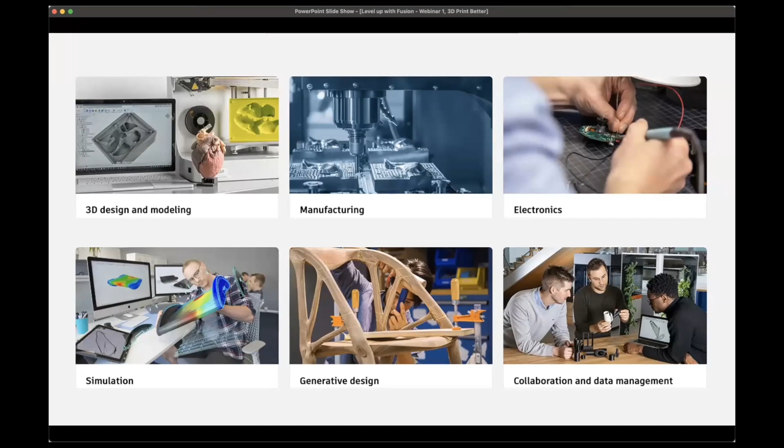Now, why would you consider using Fusion in your classes? It's because it allows your students to experience real-world product design and creation. Fusion mimics all the professional and industrial programs across the Autodesk suite, and it's used by many businesses designing real-world products. So if you bring Fusion into your classroom, students can really experience the design process, the design cycle, to make a real-world product from start to finish—whether that's a sketch, a model, manufacturing using some production technique, even creating circuit boards, electronics, animations, renderings, and more. It really allows your students to experience what it might be like to be an actual designer, product engineer, or manufacturer.

That's really exciting for students to get these skills hands-on, and we'll be talking about lots of great resources to help you get started with these topics in your class throughout tonight and the whole series.

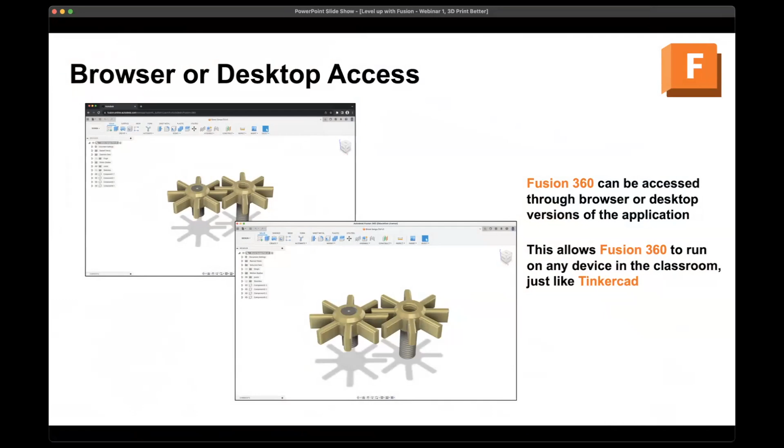A couple great questions I see that I think I'm about to answer. First off, Fusion can be accessed in the browser, just like Tinkercad, so you can use it on virtually any device, as well as on desktop—if you download it for Windows or Apple, you can use Fusion there too. So there are two different ways to access Fusion. Educators and students also have access to Fusion for free. You do need to create an Autodesk account, which is free to make, and depending on your region, students have a certain age requirement—for example, 13 in the United States, though that varies depending on where you are. But you do not need to pay for Fusion to have access; you have access through these educator or student accounts you can create.

There's also Fusion 360 Teams. I saw a question about creating classes, like in Tinkercad—it's called Teams in Fusion. You can create a team, which you might call your class, or period 1, or period 2, and you can share projects.

Students can work in groups. They can share their Fusion documents from one to the other. You as the teacher have access to seeing everything. So if a student creates something within your team, you can see that. You have access to your students' documents, and it's a great way for them to collaborate, and it actually reflects a business model. For example, if I was working in a company, I'd create a team between my colleagues. So it reflects that as well. A little bit different to Tinkercad class, but a very similar outcome and what it allows you to do as a teacher is help your students with their documents in Fusion.

There's also limitless ways to customize Fusion 360. There's a lot of different apps and things you can do, and everything's very customizable. The first thing I recommend folks do when they come from Tinkercad is customize their preferences, and I have this linked from the Tinkercad blog. You might initially, if you come from Tinkercad, be unfamiliar with the mouse and the way the buttons work. You can actually change Fusion 360's preferences to mimic how you click, scroll, and navigate just like you do in Tinkercad. If you're bringing your students from Tinkercad to Fusion, that's definitely something to consider because it'll make Fusion far more comfortable for them to approach.

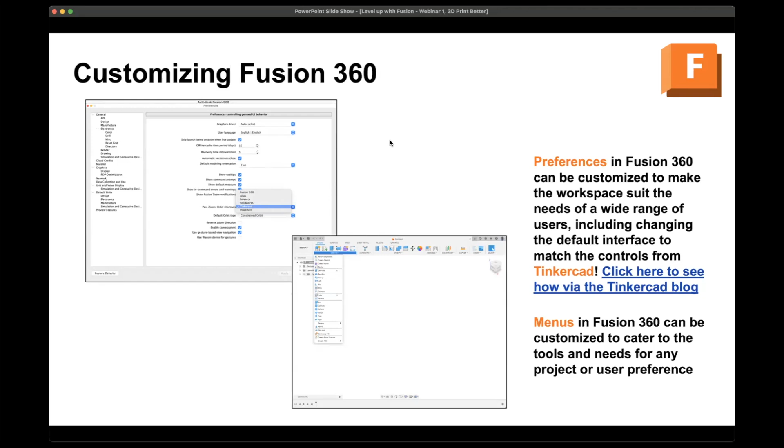So tonight's webinar is all about 3D printing better, right? Before we dive in, I think it's really important that I define the factors for determining 3D printing success, because obviously 3D printing is a very, very big environment. There's lots of different types of things you can do, lots of different types of 3D printers out there. So if I say 3D print better, how do we actually know it's better? What am I using to determine that? There's a couple factors.

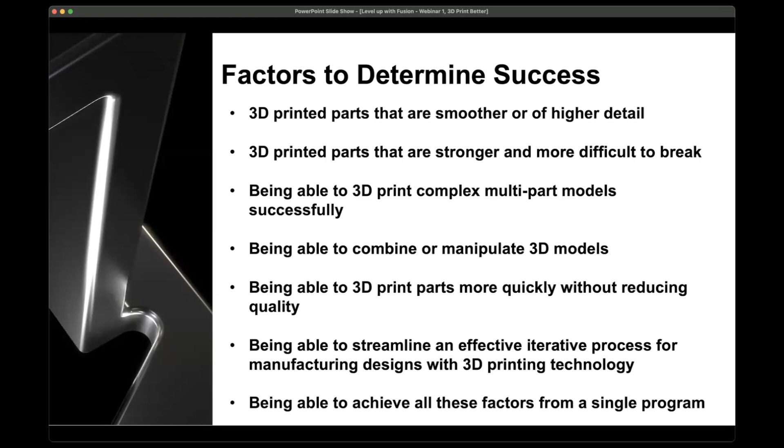First off, can we make parts that are smoother and of higher detail? That's a big reason you might want to consider taking your things from Tinkercad into Fusion, as I'll show you in a moment. Also, 3D printing parts that are stronger, more difficult to break — how can we design things to handle a high level of stress or load, if I wanted to make a bracket? Also, 3D printing multi-parts — what if I want to make something complex, very geometrically challenging? How can I do that smoothly or effectively? How do I combine different models? What if I want to take a model from one place, manipulate it, and combine it with something else? How could I actually 3D print things more quickly or effectively? And most importantly, how can we go through an iterative process — from design to testing to evaluating to manufacturing to redesigning, like a real engineer or product designer might do, all in one inclusive space? That's one of the biggest features we're going to use from Fusion — the fact that it's all included in one space as we work through 3D printing.

But I want to take a second to remind you that 3D printing is a massively diverse field. There are endless different 3D printer brands. There are different types of 3D printers, from fused deposition or fused filament types, to a laser liquid stereolithography SLA type printer, or a powder printer, or a metal printer. There are so many different types of 3D printers out there, and we can't dive deep into the nitty gritty details for each one. But there are strategies for designing good practice models that would be suitable for a lot of different 3D printing environments, and that's what we're going to really focus on tonight.

This will cover best practices, tips and strategies for implementing these practices in your classroom that work on a wide range of 3D printers. Towards the end, and even in the beginning, I'll show you some models and things from my own printers, which might be similar to the ones that you have. They'll help facilitate the conversation. So the first thing I want to talk about is designing in Fusion 360.

Let's talk about Fusion 360 versus Tinkercad. Why might you want to transition from one to the other? I'm going to change my screen share so you can see this coffee mug, which is my personal favorite first project to do in Tinkercad—because I enjoy my coffee, and because it's a real world product that students can design and create.

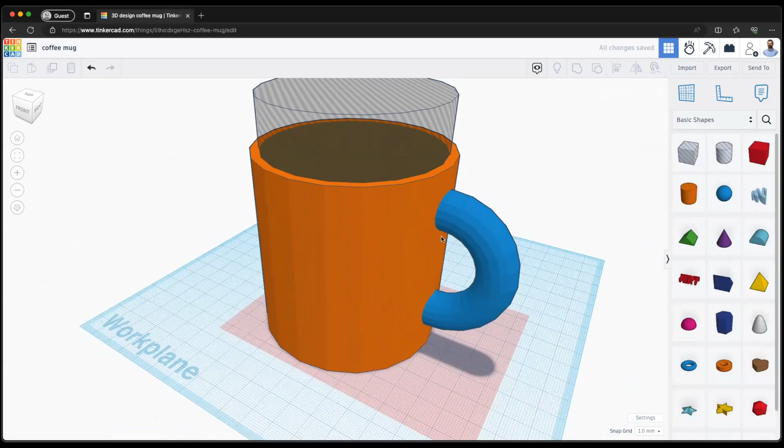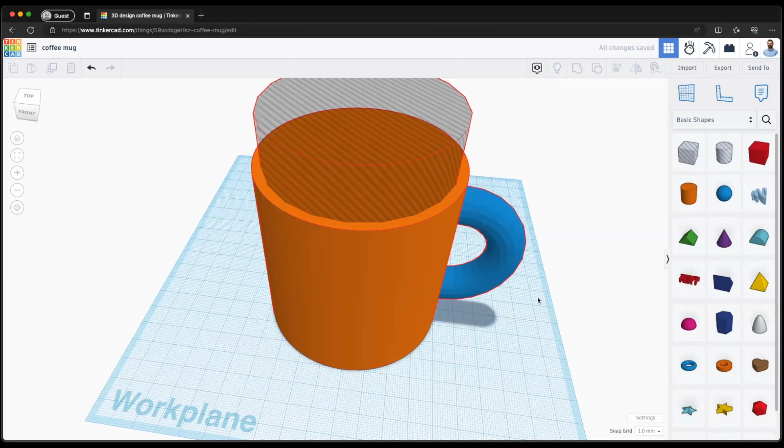We can see that this coffee mug is made from multiple parts. If I double click, you can see a couple different cylinders, and my torus shape, or rounded shape, as I design it. You'll also notice there are ridges on the sides. Yes, I can change the number of sides on my cylinder to make it smoother, but even if I go all the way up to 64 sides, you can see there are still some ridges—it's not perfectly smooth. And with my other shapes, I still see this.

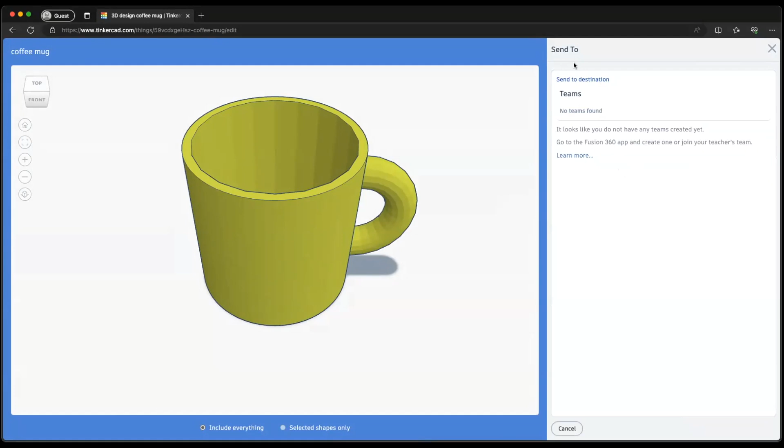One thing you can do from Tinkercad is use the export or send-to button to take your design right to Fusion 360. If you have an account set up, you can actually add things directly to a team—so if I was part of a class team, I could send that right to the team, which is super cool.

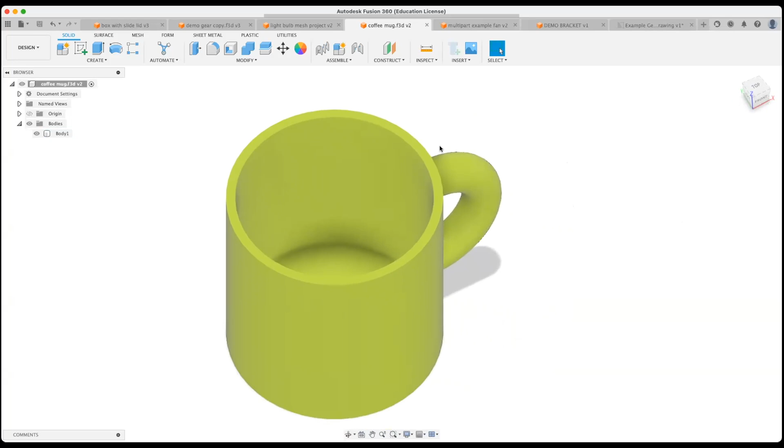You'll notice immediately after bringing your design into Fusion 360, it becomes smooth. That's because it's created into a solid shape—it takes your design and brings it into the Fusion geometry, and we can see it's smoothed over. Look at how smooth this torus is. That's automatically going to increase the quality of your designs, and you'll see this when you 3D print it.

I'm going to stop the share briefly since I need full screen for this. This is my Tinkercad mug, and you can see all those different sides in the 3D print, even in the torus—you can see those bevels. But my Fusion one is very smooth.

Very, very smooth—I didn't do anything in Fusion other than import it, and that automatically took my model and enhanced it just by bringing our design into Fusion. So that's one way to automatically improve your 3D print quality by using Fusion 360, which is excellent. Let me bring Fusion 360 back so we can continue the conversation.

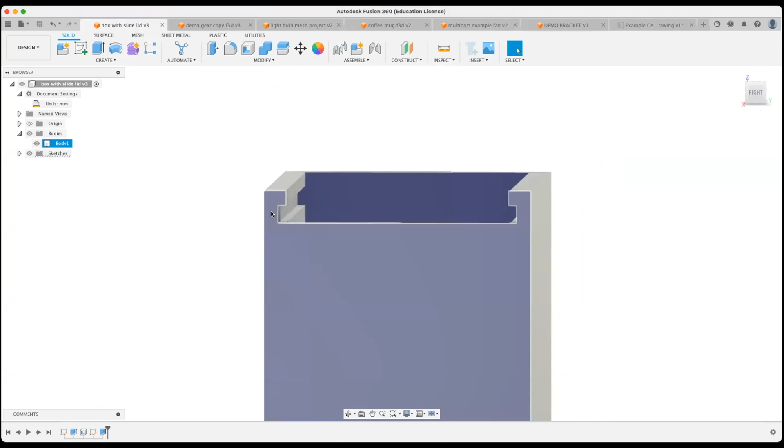Another big thing that's really important to consider is tolerances with your design. I'm going to switch to this box—I want to create a lid that slides into this box, so it's a box with a nice sliding lid. Now, if I were to make my lid fit corner to corner, it might be so rigid that it won't actually slide.

The reason is we need to give ourselves some wiggle room in general for moving mechanisms, but also as you 3D print, your filament tends to change shape—when it goes through thermal properties, it usually shrinks a little bit. So you might need to add tolerances, and this buffer is going to change depending on your setup.

You might be working with one type of printer that's higher quality versus a printer that's lower quality—the lower quality printer might need more tolerance, more wiggle room. Something else that might change is the type of filament. I often print in my classroom with PLA filament, which is usually referred to as the safest filament you can use in schools.

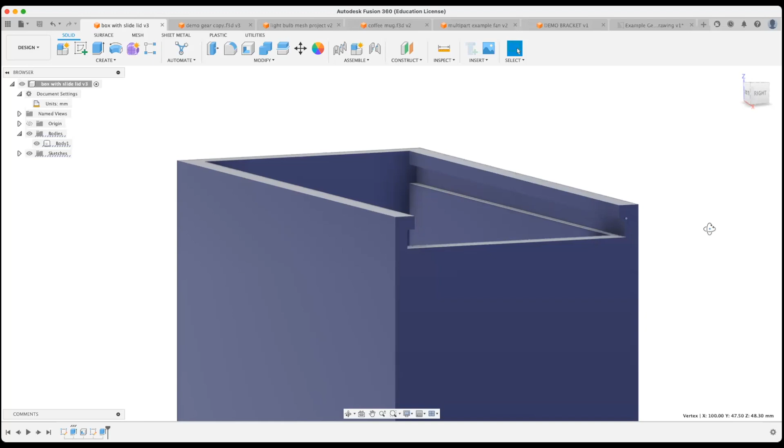And that has a completely different tolerance than, say, ABS, which prints at very different temperatures. I also sometimes find that the tolerances vary depending on the orientation, meaning that if my part's printed horizontally versus vertically, the tolerances might vary a little bit.

There we go. So in general, a good practice for tolerances is usually half a millimeter. I find that to be a good general starting point. Adding half a millimeter of space is usually a good practice when working in typical settings for PLA if you want a nice loose fit whenever I work with my students. So if I want them to make a hinge, or a lid for a box like this, I usually have them add half a millimeter of buffer.

For my folks in the States, that would be like 0.02 inches or so. Hang on, let me give you the accurate conversion for my international folks. 0.02 inches, yeah, that's what I thought. 0.02 inches, or half a millimeter, is a little bit simpler to say.

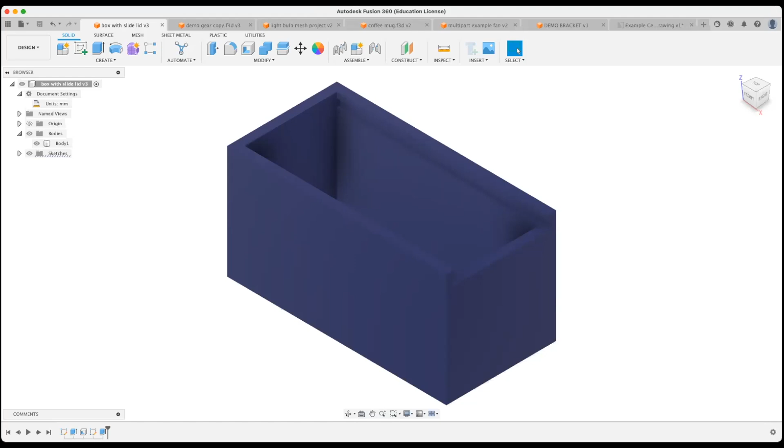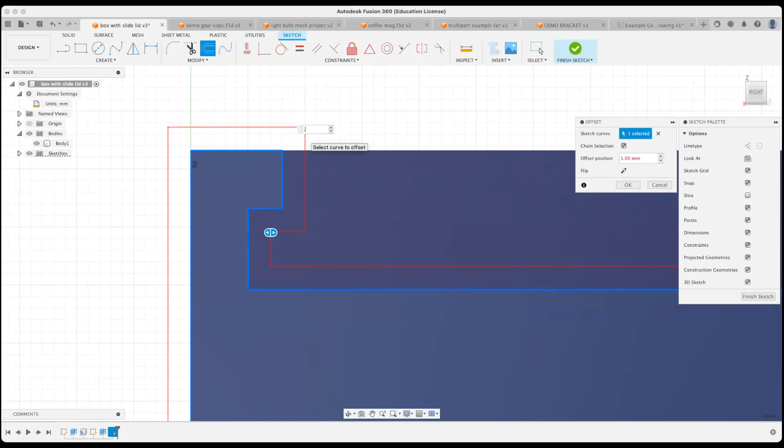So here's what I mean by that. I'm going to make my lid for my box. I'll make a new sketch on the front of my box, and I'm just going to use this offset tool to offset a shape within. You can see this red line is what I'm offsetting, and I'm going to make my offset distance 0.5 millimeters, like this. The dark blue is a little hard to see, but we can see that this line is drawn half a millimeter away on all sides within my box.

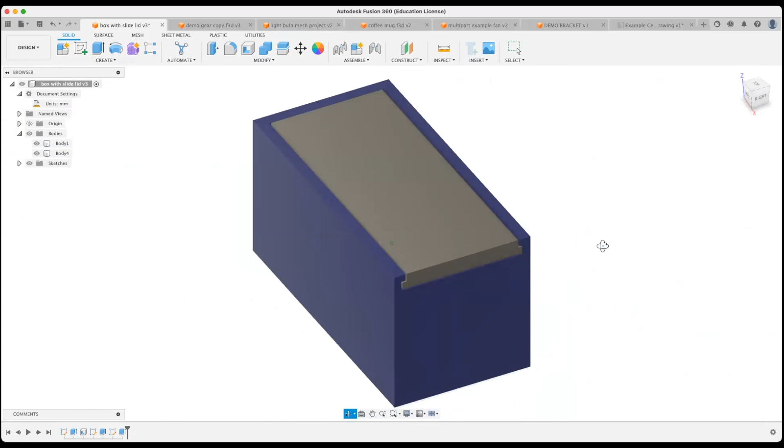Then to finish my lid off, I just need to draw a line that would connect like so. Then I'm going to extrude this lid shape until it hits this back wall, and make sure it's not the same part. So instead of saying join, which would make it a solid part, I'm going to say new, and that gives me this lid. We can see under the bodies, which are my parts, I have a lid, I have a box, and I have my tolerance added right there.

But again, I need to be super clear: half a millimeter might not be optimal in your printing conditions with your model printer. It's just a good place to start. The bigger the tolerance, the easier it will be to fit together. But of course, if you're looking for a more snug fit or whatever it is, you can experiment and use trial and error as you go.

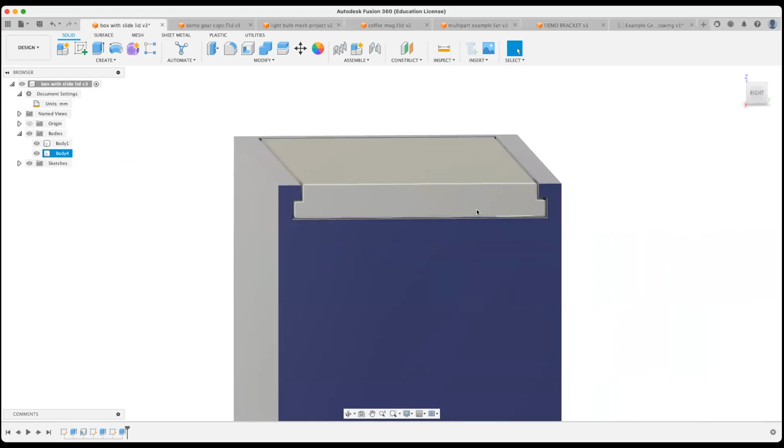I also just want to point out that we might want to consider part orientation. What I mean by that is if I were to actually 3D print this, I wouldn't want to print this box with the lid just like that. Because realistically, if I tried to put supports or actually do this, the lid's probably going to be fused with my box.

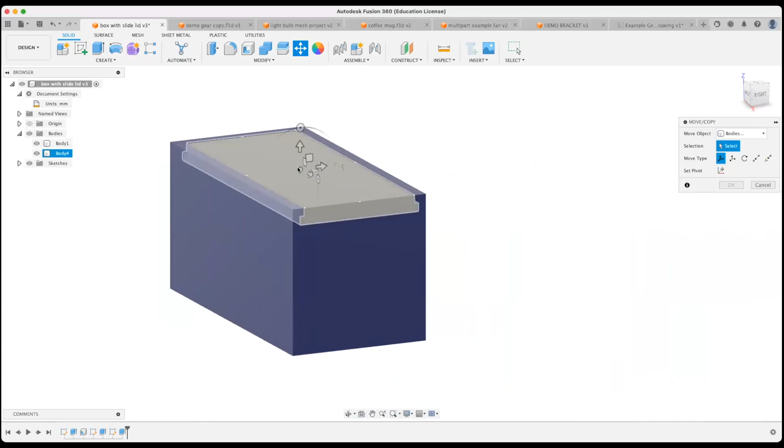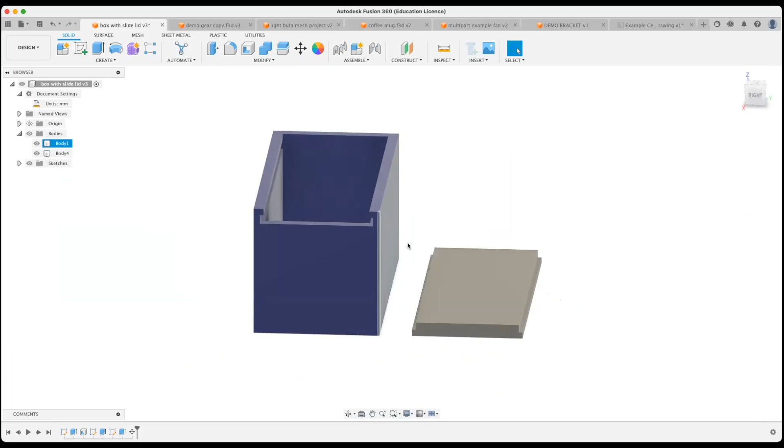So what I would actually want to do after designing it is take my lid and move it like this next to my box. Now I'm printing on this nice flat surface, with my box like so, with the opening facing up. That's going to allow me to get a much more effective and stronger print. I could even print it in two separate colors on two different prints or whatever it might be, just like so. Now, to talk more about what I'm mentioning with part orientation, I'm just going to make a really simple bracket.

I also know that some of you are completely new to Fusion, so I just want to run through some basic designs here. So what I did was I just made a sketch, which is how you usually want to start your designs, and I can use a series of tools.

As I mentioned, this is a customizable toolbar. So I can see some of the default tools, but if I browse my Create library, you can see there are many different shapes. And if you find that you use one frequently, like, for example, the 3-point arc all the time, you can actually pin it so that you can change which buttons you see. I always recommend that teachers start introducing Fusion by building a toolbar that you find to be the most supportive to your students and their needs.

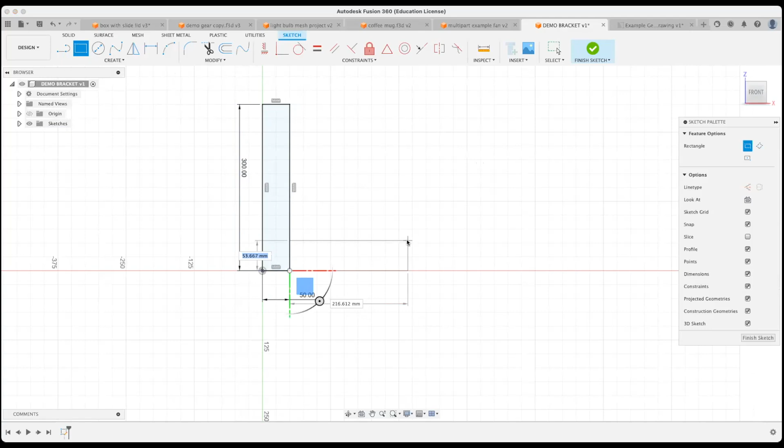I'm going to use the rectangle tool to draw a rectangle, and I can use the dimension tool to set dimensions. I'm working in millimeters, but you can set your document to whatever unit you'd like to work in. I'm just going to make a really simple bracket here.

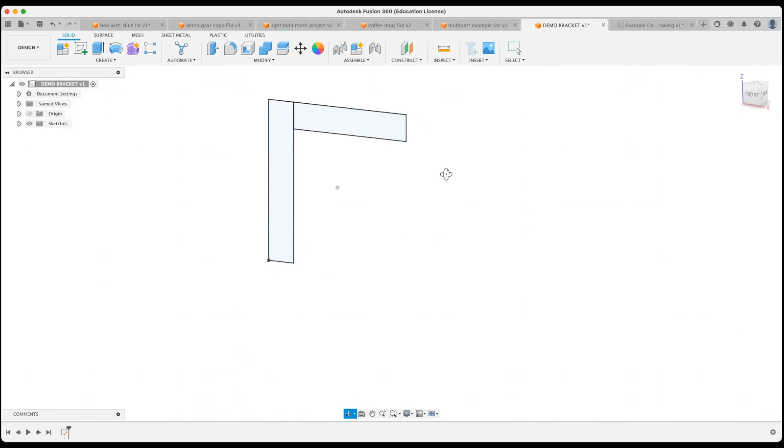I started to design it in a good way, but I want to intentionally design it in a bad way to make a point. So we're going to just make a nice little bracket, perhaps to support something, whatever it might be. Cool, bracket. Okay, I'm going to extrude my shapes.

If you're coming from Tinkercad, this is the biggest difference: in Fusion, you start with a 2D sketch and turn it into a 3D shape, whereas in Tinkercad you might actually start with a 3D shape that kind of sort of looks like this. While that does add a couple steps per se, it also opens up limitless possibilities as you're creating.

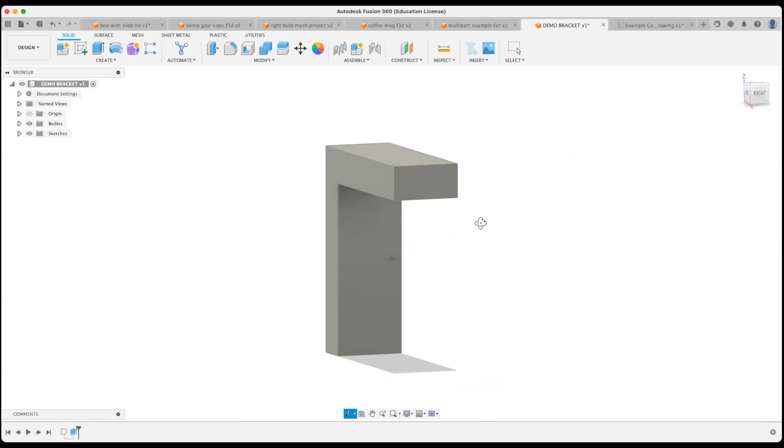Of course, we're going to dive way deeper into these types of concepts in all of our Fusion webinars to come. I'll make my bracket slightly more complex just by adding a couple holes here, as if I was actually going to mount something to this, with whatever dimensions it might be. Then I'm going to again use the extrude tool to cut these through.

Now I have my bracket. Very, very simple. I would not actually want to 3D print the part like this, because if I were to 3D print it like so, this bottom area is open, and I would be trying to 3D print in thin air. While there are some really cool videos online about people doing this, it's not the most effective way to 3D print. What you have to do in this environment is add what's called support material, which can be peeled away.

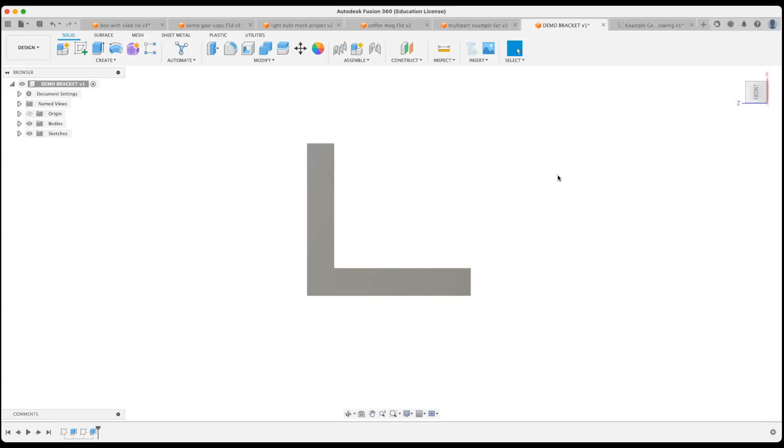For younger students, that could be a little bit more challenging. They might need to use pliers or something like that to get a really nice finish. So the best thing to do, after we design our parts, is consider print orientation. Even if I design my part like this, I might actually want to 3D print it like that, which makes sure that my flat edges are touching the build plate, reducing the need for support material.

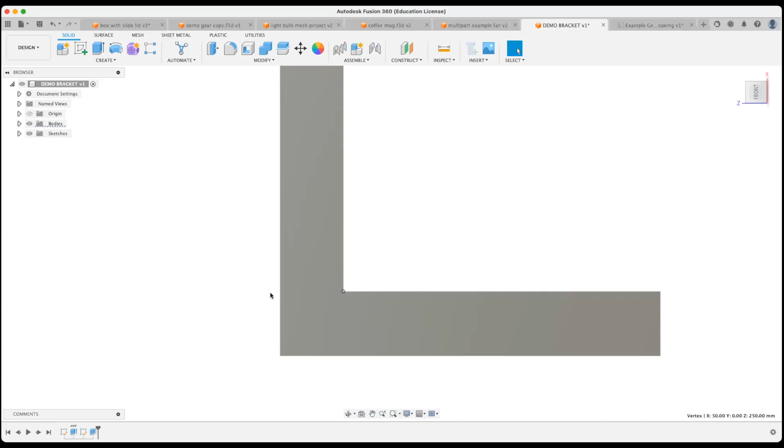Something else you might want to consider, which I know is a common question from Tinkercad users, is adding fillets or chamfers. This very sharp angle right here could be prone to cracking. Let's imagine I'm using a typical FFF, fused filament fabrication, or FDM, an extruder type where you load filament and it squeezes it out — very common types of 3D printers. If this was where a layer was, I might snap it right on that layer, so it's not a very strong part.

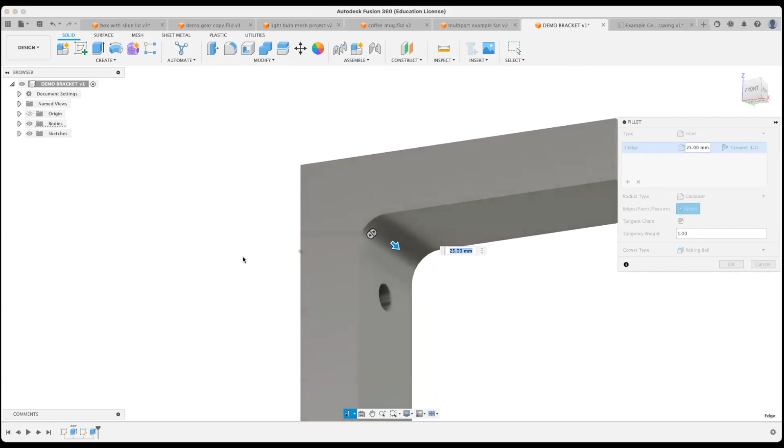But something I can add is a fillet, which is a rounded edge, like so. I can add a round right there, which will allow this corner to be taken up on multiple layers and drastically increase the strength of this part.

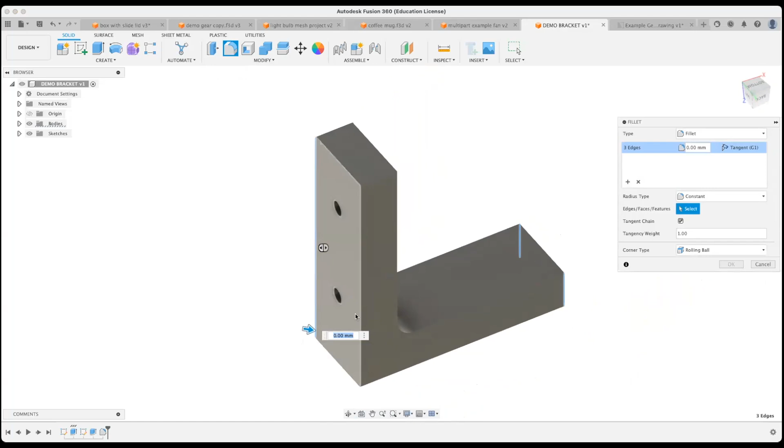I also find that some folks ask how you can 3D print more quickly. A great way to increase the speed of 3D printing is to actually get rid of your sharp corners. This isn't always ideal; you might want to print with a very sharp corner depending on your model. But if I click on my edges here and put the slightest round, a small round, as my 3D printer is traveling to do these corners, it doesn't have to double back and do this really sharp edge. It'll just sort of follow the curve, and without adjusting any print settings, you might find that reduces a noticeable amount of time.

If you're printing one bracket, is it going to save more than a couple of minutes? Maybe not. But if you're going to print 100 brackets, you might find you cut 30, 40 minutes off of that, which is a cool production technique as you go. Not required, though.

And again, depending on what your model is, that might not be an option. But it's a really great way that you can consider to not only increase the strength of your parts, but potentially save time. And I mentioned the word chamfer before.

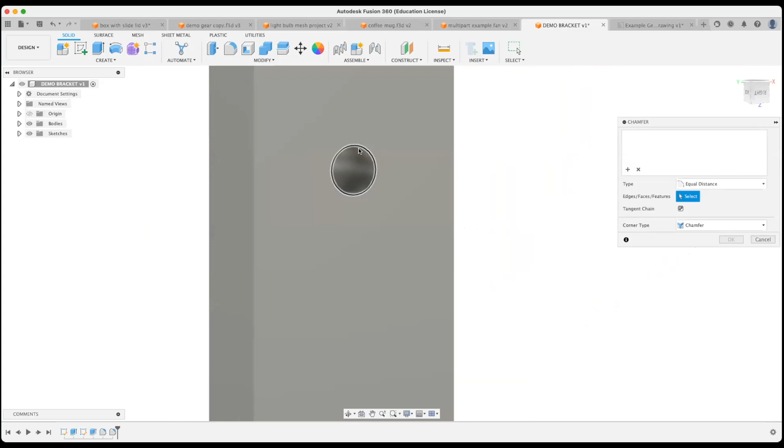So a fillet is a rounded edge. A chamfer is a slanted edge. If you've ever countersunk a hole before, like a drill bit countersink, that is a chamfer. So you might be able to add your chamfers on things, right? Which is super cool, like so, I just want to do it on both, which is great.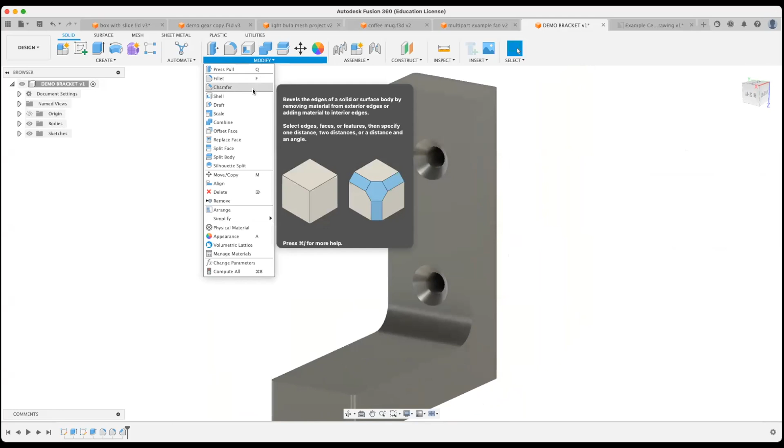And you can, of course, also add chamfers to your edges as well. So instead of doing a rounded edge, I could decide that I want to do a chamfered edge, whatever it might be. So two really easy ways for you to manipulate your model and enhance it, and add some different features for strength, for aesthetics, whatever it might be.

Really, really cool. Something else I want to talk about, multi-part designs. This is actually going to be one of the main focus points of our next webinar. We're going to be talking about how you could design something in Fusion with multiple parts, assemble it, do simulations with it, make threaded screws and things. It's going to be awesome, I hope to see you there, it's in 2 weeks. But we can also talk about it for 3D printing.

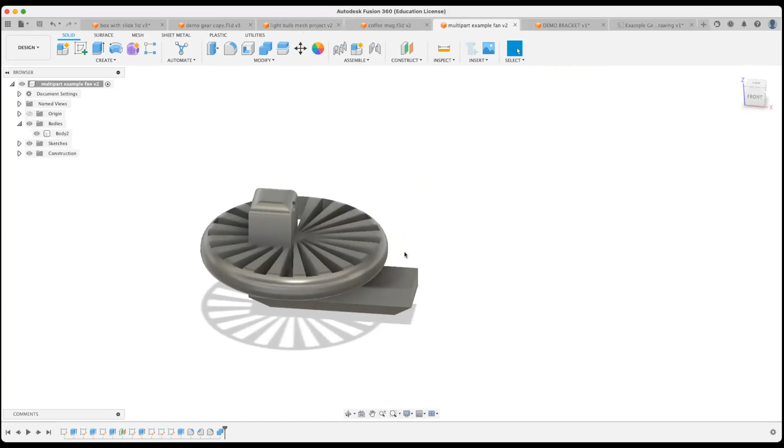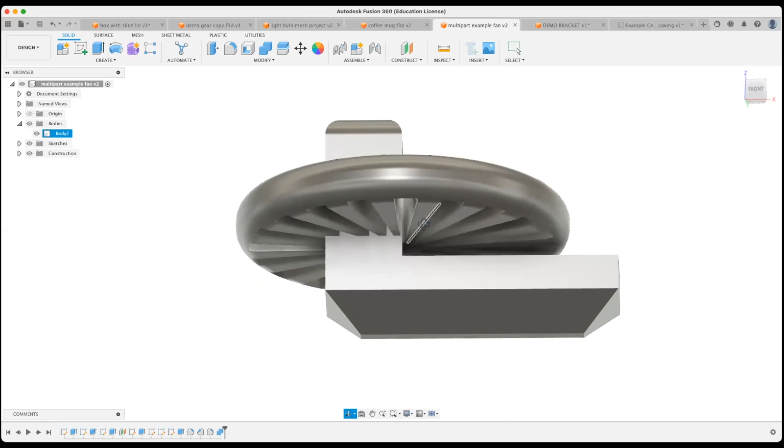So I have this kind of random gear thing, okay, so it's a bracket with a fan on it. Right now this is a solid part, we can see that I have this solid piece. And this is also a very difficult part to 3D print. I don't really have any majorly flat surfaces, so I don't have a great flat surface to put on my build platform. I have many overhangs, and if I was going to put support material in, it would take a lot of effort to peel support material out from all these little fan blades and things like that.

So a more effective way to 3D print something complex like this might actually be to design these in two separate parts. For example, I might have this bracket piece as one part, and this fan blade piece as another part. While I can design them together like so, when I actually go to 3D print these parts, I might print them something like this. So I'll have this fan piece sitting flat without needing any support material, maybe some on the outer edge, but probably not. That rounded surface should be fine depending on your print settings.

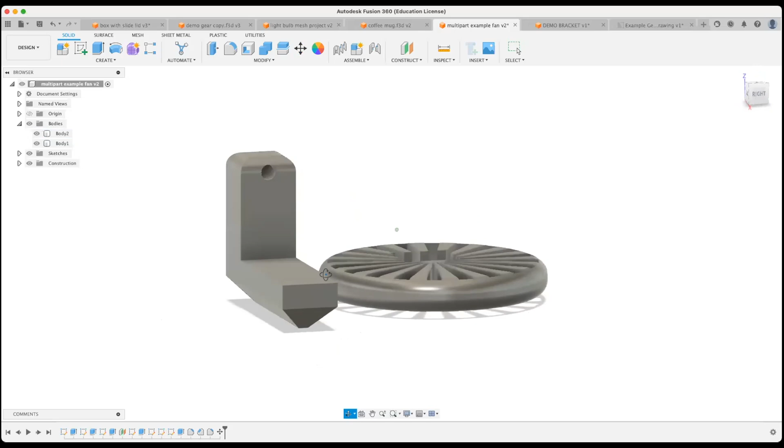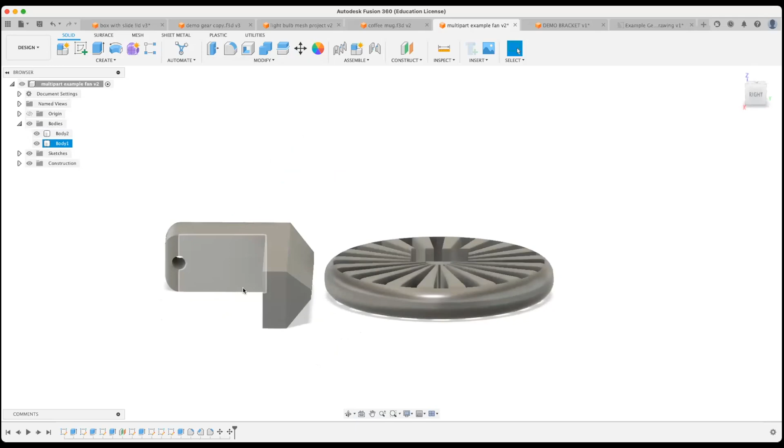And maybe I take this bracket looking thing and try to rotate it. Hopefully, maybe, yeah, there we go, like so. And perhaps I print this like that, trying to get the most surface area touching the build volume. And that also probably won't need any supports. So that could be printed in two separate parts like so, and then glued together afterwards. So that's just something to consider, that if you can't necessarily adjust the orientation of your part, like my L bracket, or can't just rotate it and flip it, maybe consider designing things in multiple parts to 3D print side by side like this and then glue together. It might be significantly stronger.

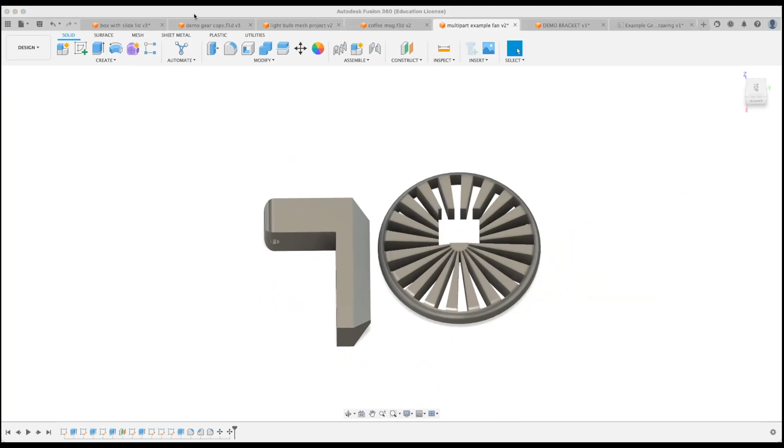Another really awesome feature that Fusion allows you to do is work with both solids, like we have been so far in this webinar, or also work with meshes. So here's what I mean. This is an STL file that I imported, so this is a mesh that was imported. You can design STL files in Tinkercad, of course, and you can find them in open galleries or whatever it might be. I've imported this into Fusion, but I can actually manipulate this mesh.

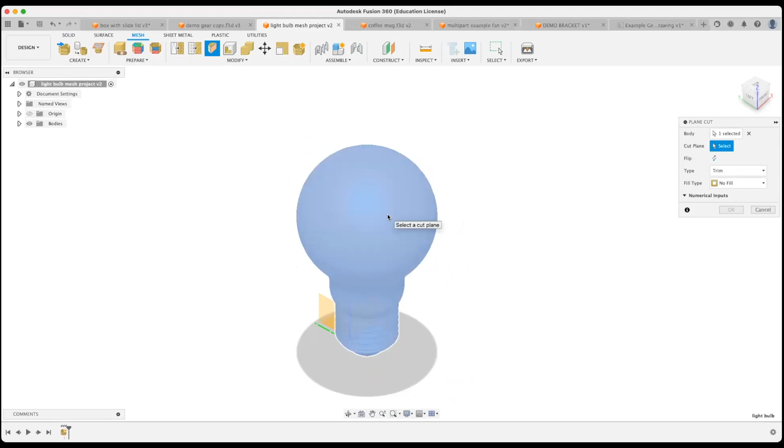So I can go to my mesh category and I can change the size of it. I could break it up into parts. I could actually convert this mesh to be a solid, or I could take a solid and make it into a mesh, and I could individually adjust each feature of this. Just to show you how easy that is, let's say I wanted to cut this, right, so I might want to just cut this bulb right along this plane. I can actually use this very simple cut feature to slice this STL in half. And we can also see that it's a mesh, which is hollow, right, so there is no solid fill. But I have a couple options here as I'm adjusting this.

So I can actually fill this to be a solid piece, which is super cool as I go. And that's going to give me this surface that I can work with.

But here's the really cool thing about Fusion: you can work with meshes and solid shapes in unison. So let's say I have this light bulb and I want to turn this into a plaque, an award, like a greatest idea award.

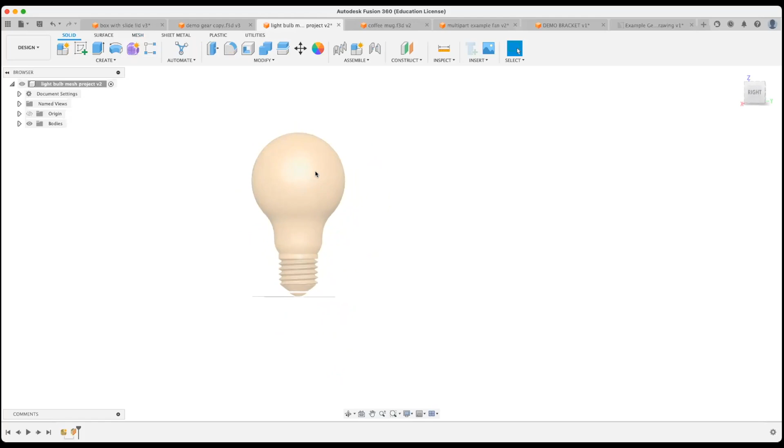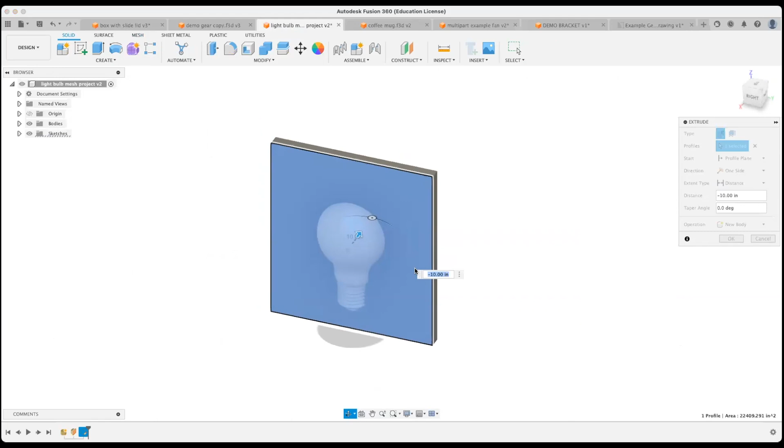So I imported this bulb, and maybe I go back to solids where I still see my meshes, and I'm going to create a sketch right here on this surface. And I'm going to design a little plaque board, an award board, right around my light bulb, like I did with the lid. And I'm going to extrude this into a solid piece.

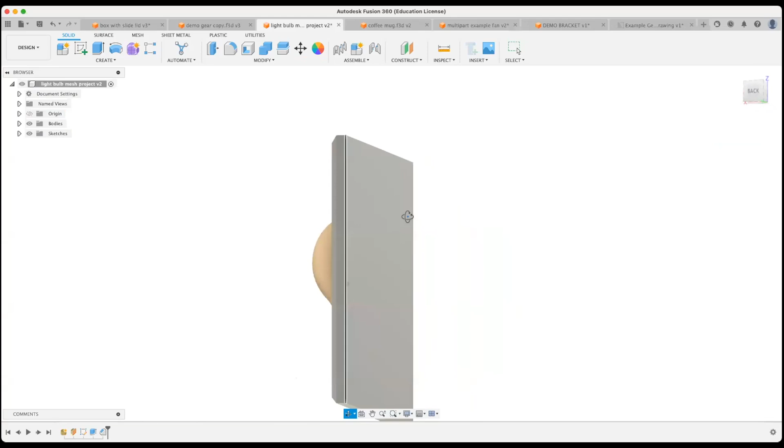I'm certainly not going to put a ton of time into making this the prettiest award, but I can maybe add a little chamfered edge, some holes to mount this, or a text box to write things. So I have this solid shape that I designed working in unison with this mesh, this STL shape.

And I just realized that they're not touching, so I can fix that to actually bring them together, so they're making contact. And that's really cool - I can actually 3D print or download or export these two files together.

So that allows you to work with different types of files in one environment, which gives you pros and cons. You might want to manipulate or tweak things for a lot of different types of products. Typically you work with meshes in one program and solids in another program. Fusion sort of blends them all together through these different menus and through this interface, which is really, really cool as you're working with different designs.

Which is an awesome strategy for your students when they're trying to make really custom, unique things. Something else that's really nice - I mentioned earlier that you can use Fusion to bring students closer to industrial, real-world applications. Let's say that you are designing a product, a part, and I'm going to switch to this gear.

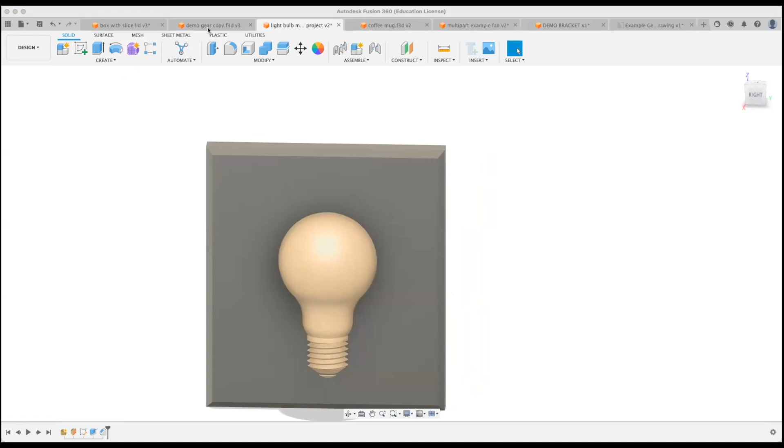And I might want to actually have this manufactured, or I might want this product to be something that I put on sale, whatever it might be. Something that's really commonly used is a technical drawing. A technical drawing shows all the dimensions, all the plans, the blueprints.

So if I was actually going to have this part manufactured, I might need to send them the design file. I might actually want to send them the technical drawing, or let's say that I had a client and I wanted them to approve this before I manufacture it. A technical drawing is a really great way for you to communicate all the information.

And you can make that really, really easily. So if we go to the drawing category under my design window, I can actually make a drawing from this design. So it's going to make a drawing using this shape, and it's going to import all my settings, if I was working in millimeters, whatever it is.

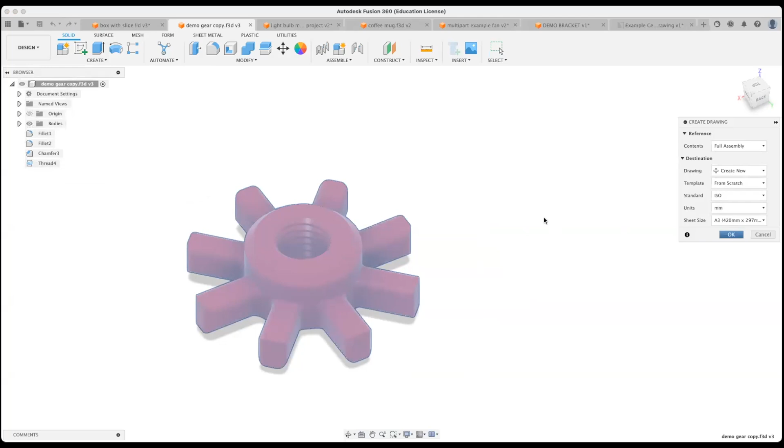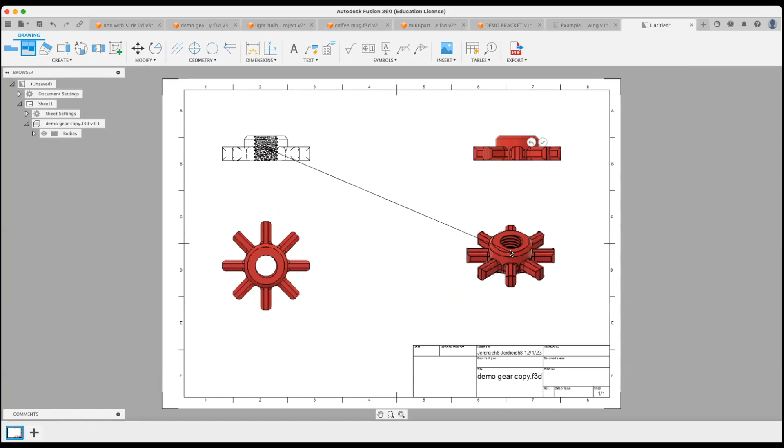I'm not going to put a ton of time into making this super accurate and super aesthetically pleasing. But what I can do is place the different view angles of my sketch, like so, to show what this part looks like.

You can also change the views. So for example, you can see that I have what's called a translucent, or through-like, view, or you can see the threads and things. But I can actually change the way that this appears if I want.

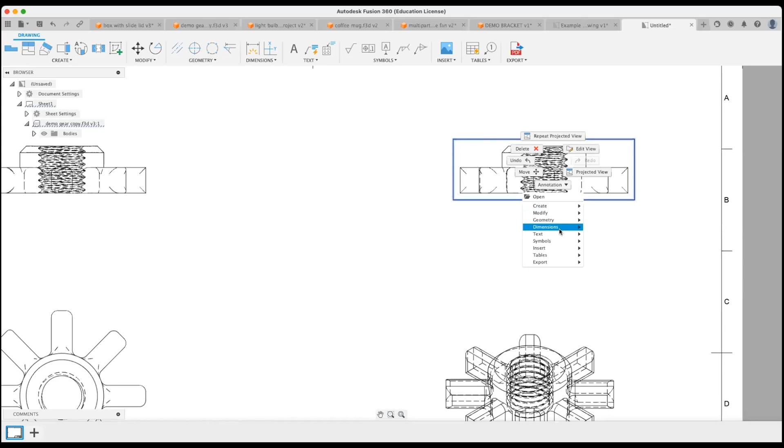I can also add different dimensions and things like that just to sort of customize the setting. So perhaps I actually want this to be a solid shape, and perhaps I want this to not show the threads, whatever it might be.

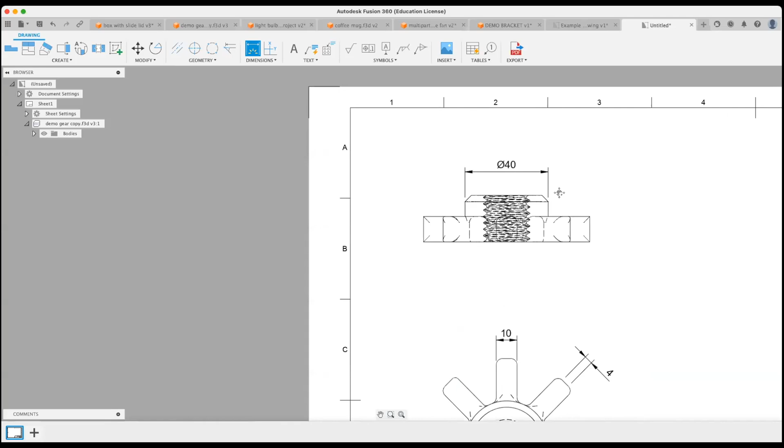And I can actually add dimensions to this. So I can click on any points - for example, what is the distance from here to here, 10 millimeters - and I can place these dimensions. I want to be super clear that I'm not actually typing any dimensions in right now. The dimensions are being pulled from the design. So I've already made this gear, and it's actually just dropping the dimensions from my design.

And if I were to go back to the gear and adjust something - if I were to make this, let's say, bigger than 40 millimeters - the drawing can update.

So this is a fluid document that works side by side as you're creating this technical drawing. Students can export these and download them as PDFs, so if they were going to create a presentation and share their designs, really cool. It allows you to bring in the concepts of technical drawing, creating a blueprint for a product in Fusion, which is really awesome.

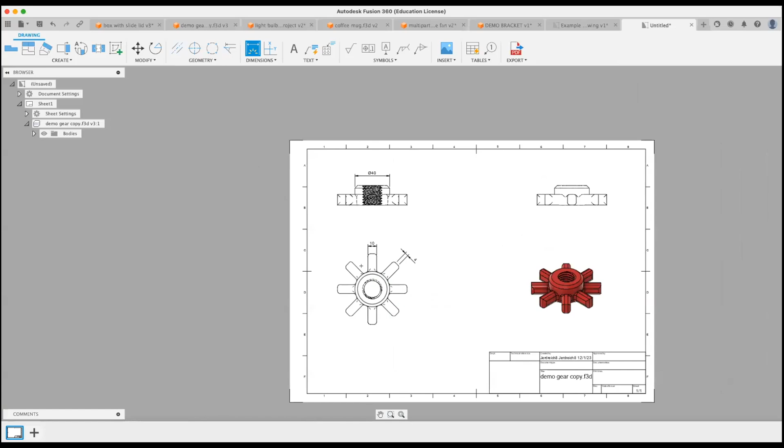And in the slideshow that I'm going to share, I have a more detailed version of this, so you can kind of see what that looks like if you want to try to bring it into a more complex thing.

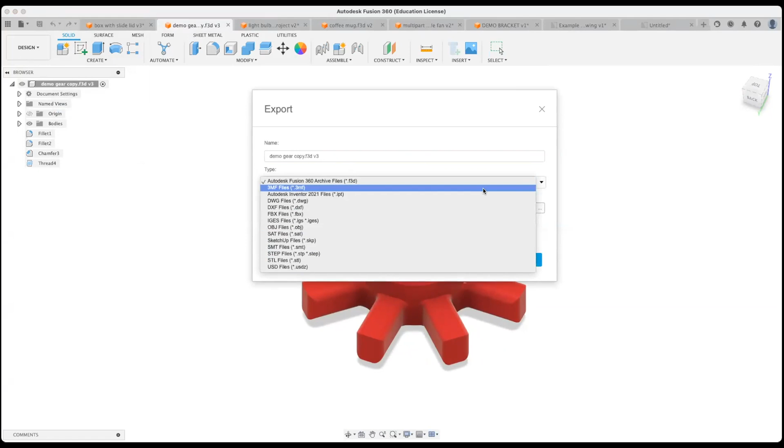And speaking of exporting, what if I wanted to export something from Fusion and turn it into, let's say, an STL file? How do we do that? Well, you can simply click File, Export, and name it whatever it is. You can also pick from a wide range of files. An STL file or an OBJ file are super common when working with 3D printing. But let's say you were designing something for laser cutting or whatever it might be, you can export as a DXF or a DWG. So you can simply export your design and that will take it from Fusion into whatever format you're trying to work with. Super easy to download and export models, very similar to Tinkercad.

Something else that's really cool, you may have noticed next to all my designs it has a little V and a number, and that's the versions. That's because Fusion has version history. So as you're working on things, designing things, let's say you make a mistake, or you change something and you're like, wait, what did I do before? It was working better before. You can go back and roll back in your version history and see all your designs.

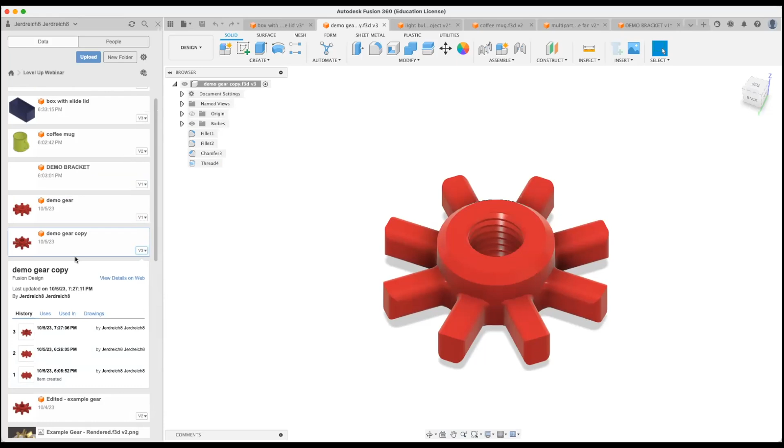So if I open up my side panel here, you'll notice that things with multiple versions have this little V. I can click on this and see when these things were last edited, and I can restore any past version, which is awesome. When you're working with students, if they delete something and you got to go back, version history is great. It automatically saves, automatically updates, which is really cool. Of course you can manually save things too, which is always good. Save early and save often, as I always like to say. But it's good to know that Fusion is working in the background to make versions of things and keep things going effectively.

So the next thing I want to show you is the manufacturing tab. Let's say you have your design and you're ready to 3D print. Can you export as an STL and bring it into a CAM program, like a slicer program for your 3D printer? Of course. But you can also do that right from Fusion, which is a great opportunity to do the whole process of creation in this one program.

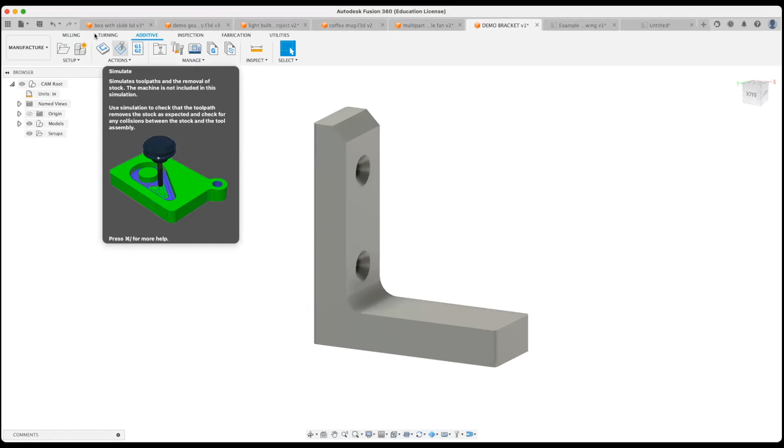So I'm going to switch to the thing we made tonight, my demo bracket, and go to the manufacturing space. Now in Fusion you can manufacture using a wide range of production techniques. For example, additive manufacturing, which is 3D printing, which is what we're talking about tonight. But in Fusion there's also milling, turning if you're working with a lathe, options for laser cutters and plasma cutters, and lots of different types of machines can work with Fusion. I know we have some CNC themed webinars scheduled in the coming months, so check out that webinar schedule if you want to learn more about those things. Tonight, of course, we're talking all about additive.

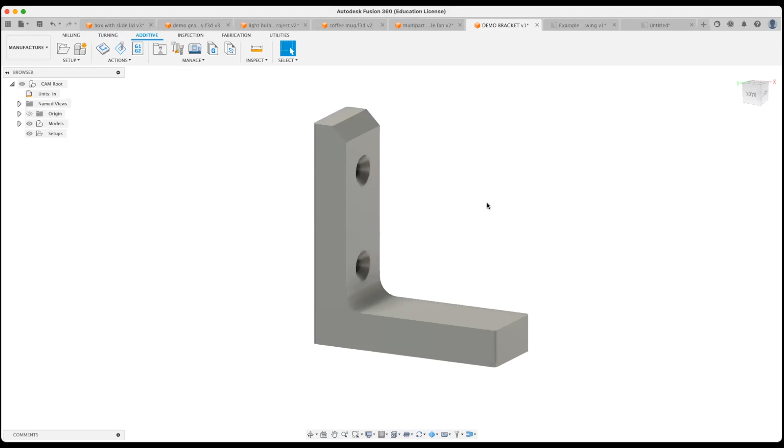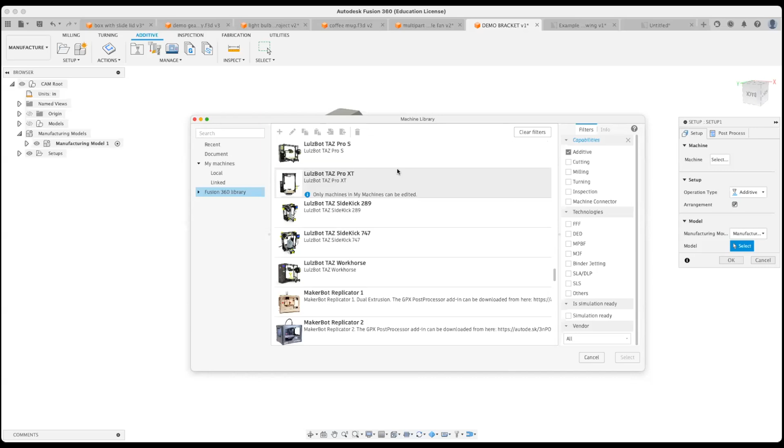And the first thing you want to do in this manufacturing window is create a new setup. In the setup panel, this is where you select your machine. The Fusion 360 library has, I don't even know, a ton of printers, many many printers. And if your printer isn't in here, you can actually create your own custom profile, that's totally fine. So I might select my Lulzbot that I have, which is right here, which is super cool. You can also import profiles and things.

And you know what, I think I actually just selected the wrong machine, so let me switch to that one, which is great. I'm just realizing how large my bracket is. Oh boy.

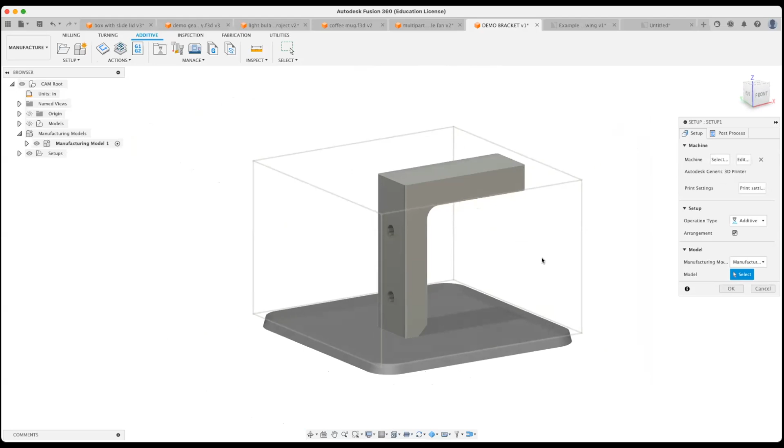So I didn't really measure very well when I made my bracket, so this is going to be the world's biggest bracket with my 3D printer here, but that's fine because it fits. When I select my printer, we can see this build platform, which changes based on your printer, showing you how much space you have.

After I've selected my printer, the next thing I want to do is choose my print settings. This is where you might choose your filament, and again there are lots of filament options built in, whether you're working with PLA or PETG, which are two common rigid filaments, but there's also flexible TPU.

To be super clear, these are starting templates, and you can absolutely modify them. So what I've done is picked the PLA template and made a copy of it, which allows me to go in and edit every parameter for this.

So I might change my nozzle extrusions. I can change my infill, so I might want this to be an infill of 60, which is really high, or bring it down to 20 if I want it to print faster. I can also change the infill pattern and things like that, and you can really fine tune every single thing.

If you want to add a brim or a raft, you can do that. You can enable support material. You'll also notice it says extruder 1 because I'm working with a single extruder printer in this example, but Fusion is compatible with multiple extruders, so whatever your printer has, Fusion will work with that, and you can adjust it all right here.

So I'm not going to enable any support. Actually, I will enable support material just so we can see what happens, as we try to do this the most optimal way. You can adjust your speed, your travel, all these different things.

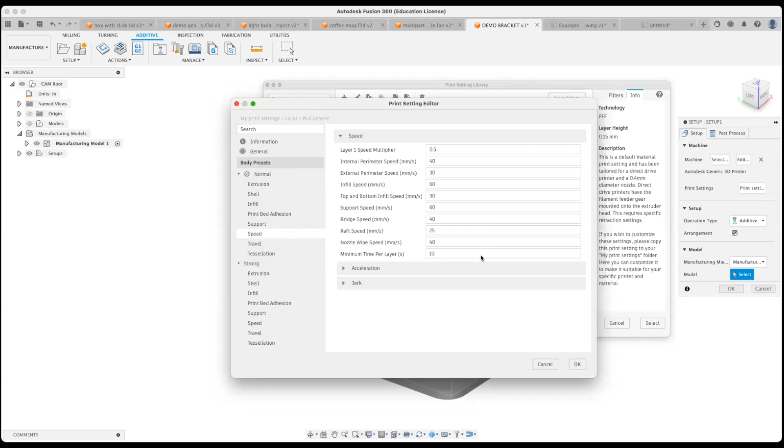So you can really fine tune and select, and you can have multiple profiles. Personally, I might have a PLA fast profile for something I use all the time, but I also might have a PLA high detail profile. For final projects, if a student wants to make something really small like jewelry, I'd switch to the high detail one. So I might use two profiles commonly, but you can fine tune and have as many profiles as you want.

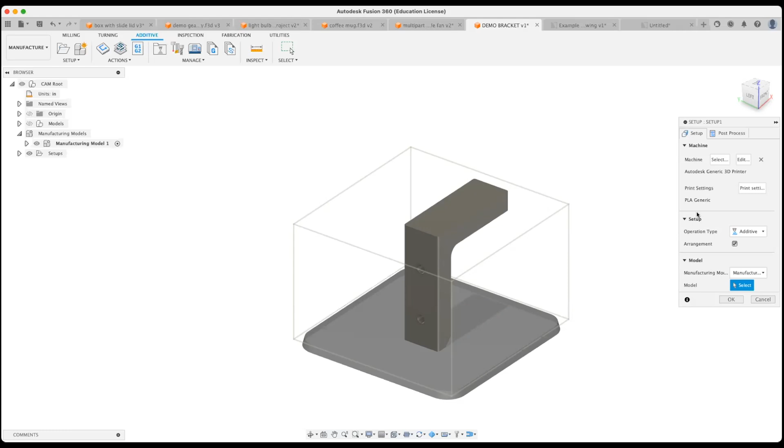And of course, we have to choose what it is that we're going to be 3D printing. Now the first thing I need to do is orient this a little bit better on my work plane, because this is not the optimal way to 3D print this. I'm also not completely sure that it's going to fit on my printer, so I might need to change size.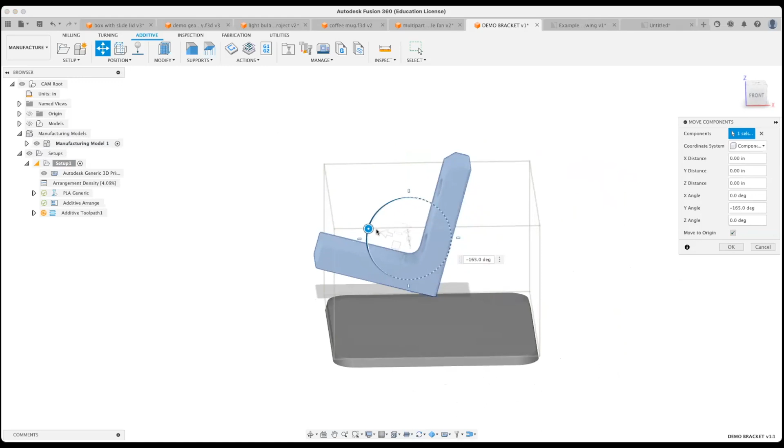But I might want to actually rotate this around like so. And I'm getting a warning saying, hey, this is not in your printer, telling me I'm exceeding the limitations of my printer. But there are also really handy buttons to make sure everything's touching the work plane, and it does fit.

So that's super great. Now I rotate this around and put it in what I think might be optimal. I actually think it's probably going to print a little bit better if I rotate it. Let's go one more rotation like that, trying to get the most surface area touching my print bed as possible.

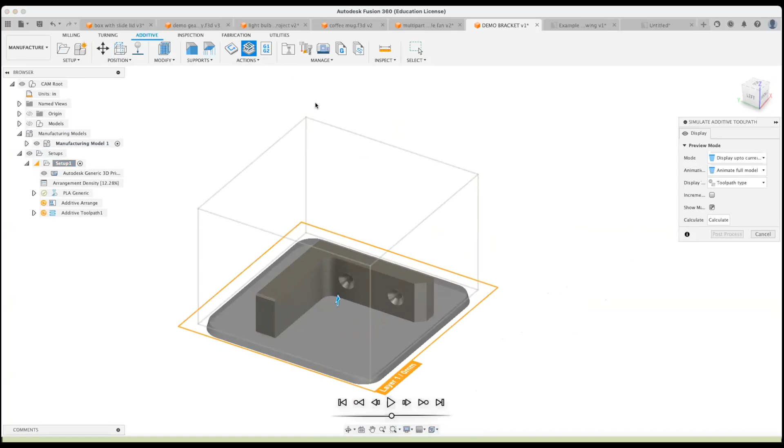Okay, just like so. The next thing I want to do is simulate and generate my toolpath as I go. This is going to take a moment to actually calculate my additive toolpath, which I'll be able to show you in just a second.

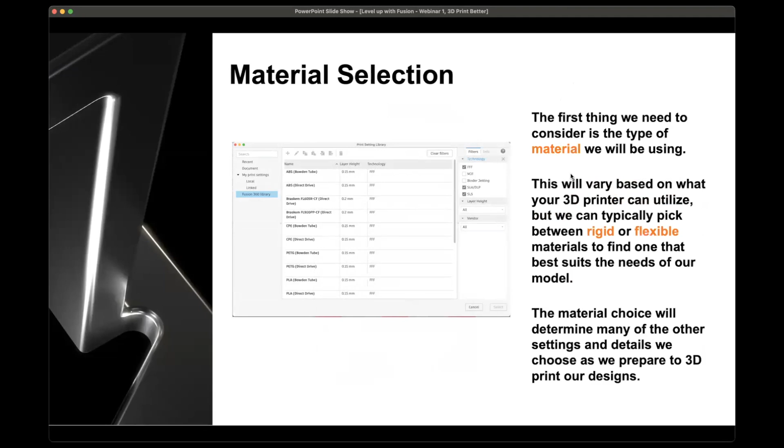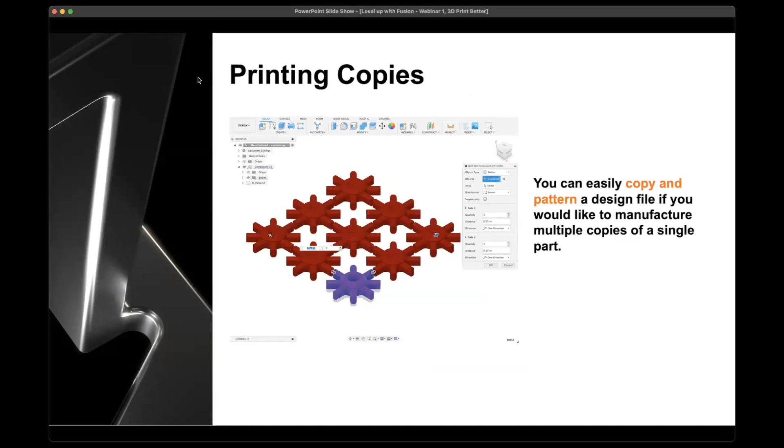Something else that's really cool, showing how you can bring in industry practices: you can actually use Fusion to pattern a part. Let's say I want to make many of these gears and create copies of them with parameters. You can use it to arrange as many things as you want across your simulated 3D print bed, which is really cool.

What I'm trying to show you right now is this simulated toolpath, where it shows you step by step, layer by layer, what it would look like. Let me switch back to my Fusion screen. I switched to a smaller L bracket because I gave myself a bit of an error, and Zoom and Fusion didn't get along, so I apologize for that.

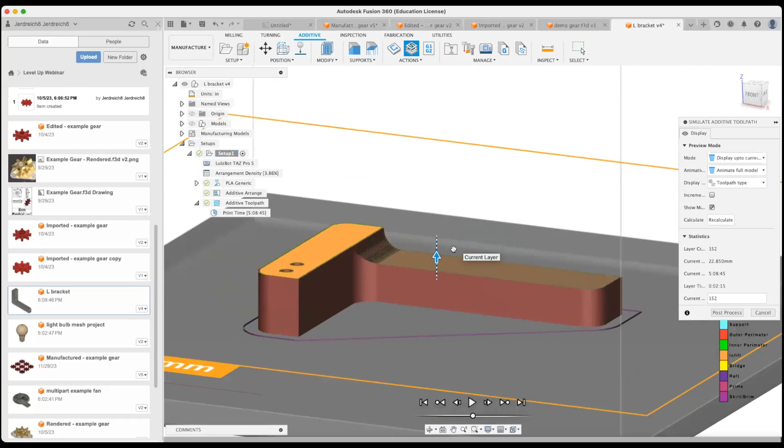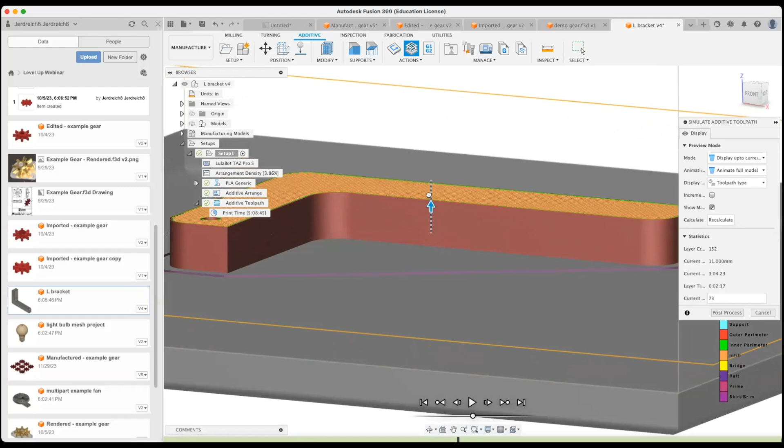What's happening right now is I'm generating this toolpath, and I can actually view exactly what it's going to do layer by layer. So this is the slicing that's happening—it took my solid model and sliced it layer by layer. With this really high fill density, super close together, this is going to take 5 hours and 8 minutes with my print settings, and I can see that here. I can drag this through each layer to see all the different components of my 3D model.

So when I have this, I've designed it, brought it into Fusion, brought it into manufacturing, and I'm actually ready to send this to my 3D printer.

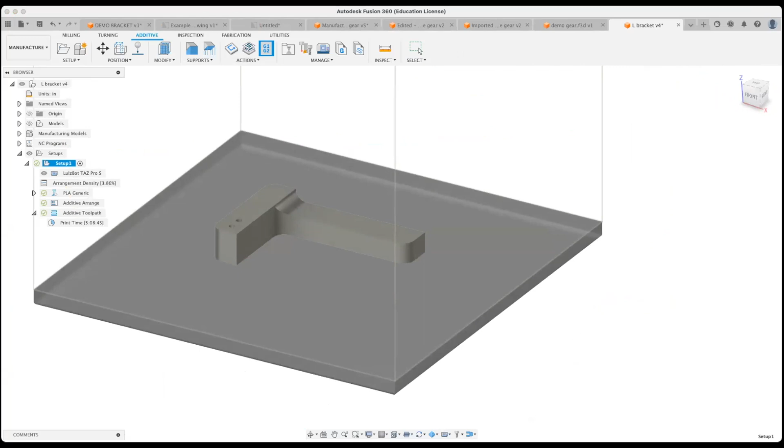I want to use the post-process command window, which looks like this, and you can name this—I might call it L brackets strong PLA, whatever it might be. You'll see which printer you designed it for, and you can adjust the units if needed, but probably not. If you have multiple toolpaths, you can fine tune things to make multiple jobs, but this is more effective for a CNC thing if you're going to mill something.

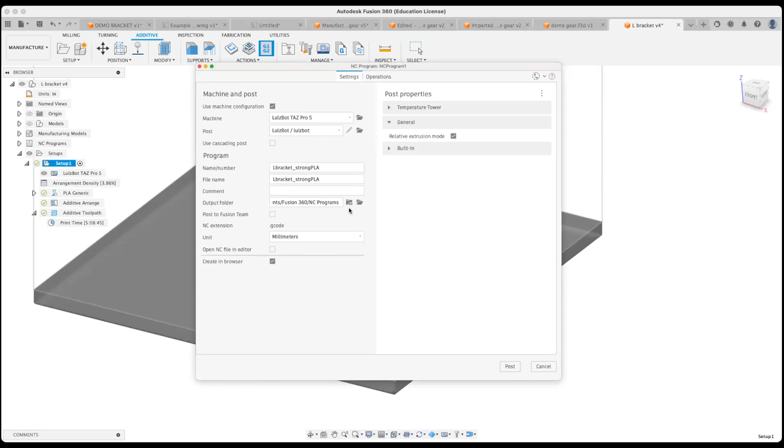When I hit post, this will save a G-code file, and you can bring that G-code file over to your printer, which would vary a little depending on your printer—whether it's going to a printer on the network, USB, or an SD card—but that generates a G-code file that allows you to 3D print your models.

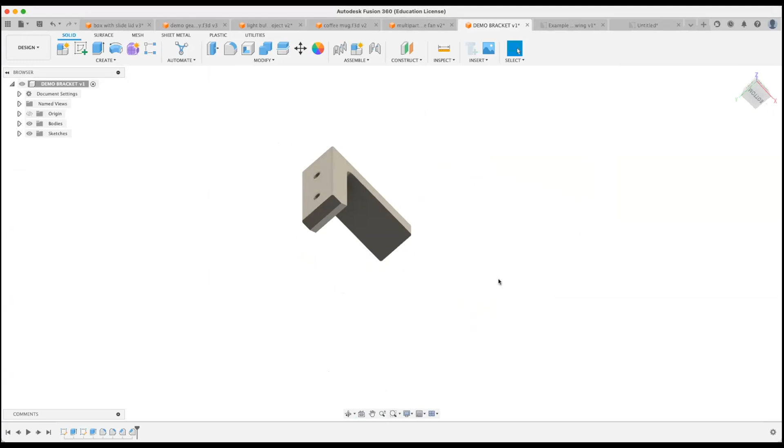So let's do a recap and review. So far we've covered everything from the design, where we can design a bracket or whatever it might be, bringing it into the manufacturing stages to prepare for manufacturing. We can create a drawing for our parts, strengthen our parts by adding fillets and chamfers and changing the part orientation, and separate things into multiple features—all in just this one program.

While we didn't cover it tonight, since we only had so much time together, you can also challenge your students to create simulations of their parts, animations, and renderings. These are things we're going to be covering in future Level Up with Fusion in Secondary Education webinars for many, many weeks to come, so make sure you stay in tune with our upcoming sessions.

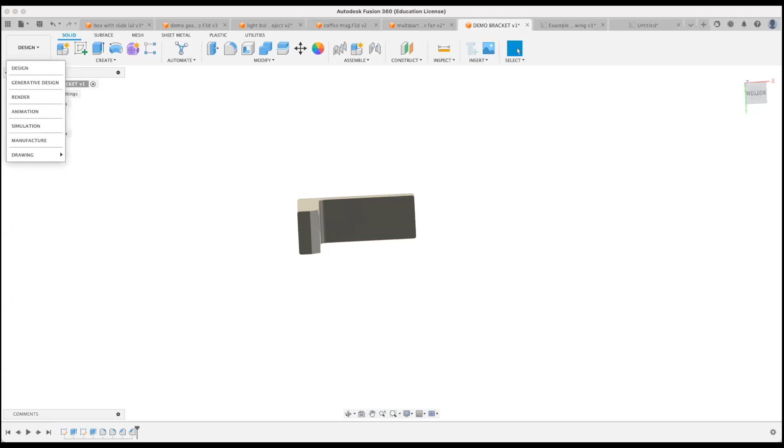I also just remind you, of course, there are so many different 3D printing environments, so the best thing you can do is play around a little bit—with the tolerances, the different types of constraints, adjust things, find the best flow, find the best tools that work for you. Because Fusion is so customizable, you can really build a Fusion workspace that supports both you and your students' needs.